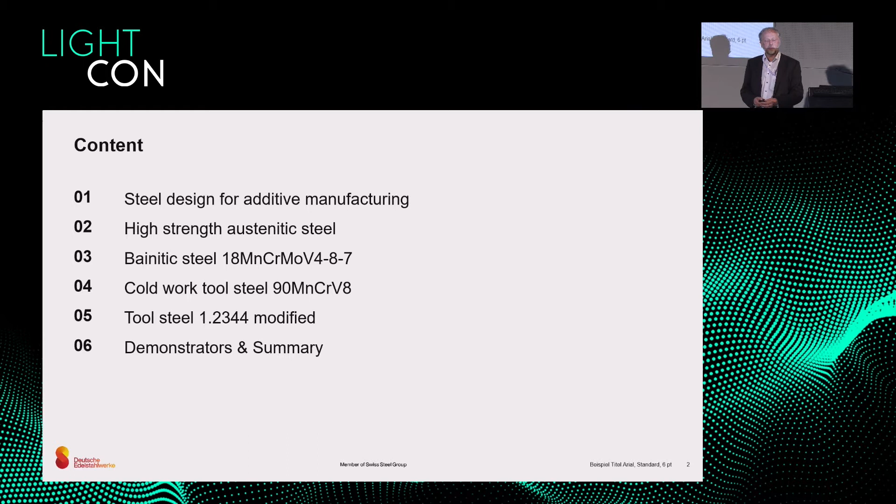I will shortly give an introduction about how we do steel design for additive manufacturing. Then I will present four new steels, and I will show you a few demonstrators and give you a short summary about the new steels.

How do we design new steels? We start with a wish list. We have a lot of engineers here, and I think most of them have had at least one semester of material science. One common steel is a quenched and tempered steel, 42CrMo4. Another one is also a quenched and tempered steel, a tool steel with AISI designation H13. The European designation is 2344.

Steel has some very interesting properties. It has a high temperature structure, a very dense structure, but soft. We call it austenite, a face-centered structure. It also has a low temperature structure. This heat treatment, the quench and tempering process, is a very nice property of steel, because you can adjust the mechanical properties by the heat treatment. You can adjust toughness, strength, and hardness to your needs. This is a very nice property, but it also causes some difficulties, as shown later.

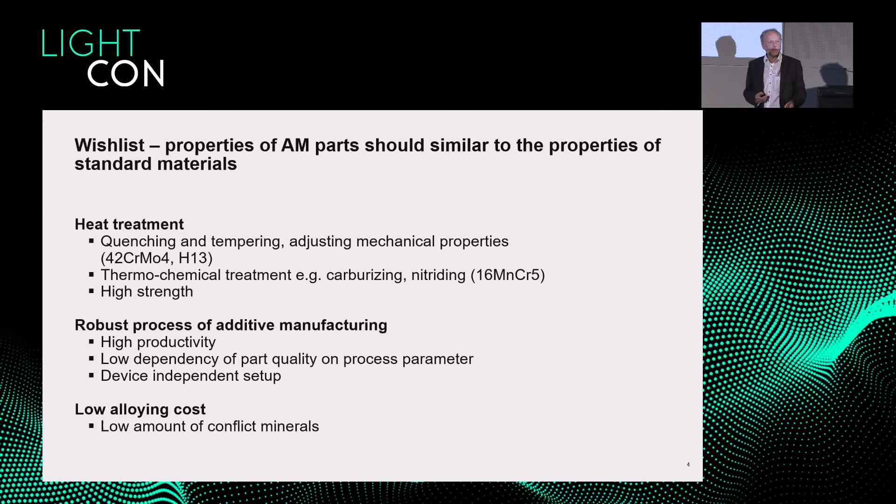So starting the design of new materials or new steels for additive manufacturing, we work with a very simple model. This is the measured elongation over temperature, valid for a process of rapid heating and rapid cooling, which is standard for additive manufacturing when you produce your part layer by layer. You start with high temperature because you heat a small spot, within a big amount of processed material. You cool very fast, and then you have a phase transition at low temperature.

Normally, this is a martensite. In this case, you have a slightly abnormal behavior of this material: you cool it down, and it increases in size. That's typical for steel, caused by this phase transition from the high temperature structure to the low temperature structure. This causes some internal stresses if we work with a model of two layers. The cold one is still martensite, and the upper layer is transforming from austenite to martensite. Martensite can be very hard, and this produces stresses in the lower layer.

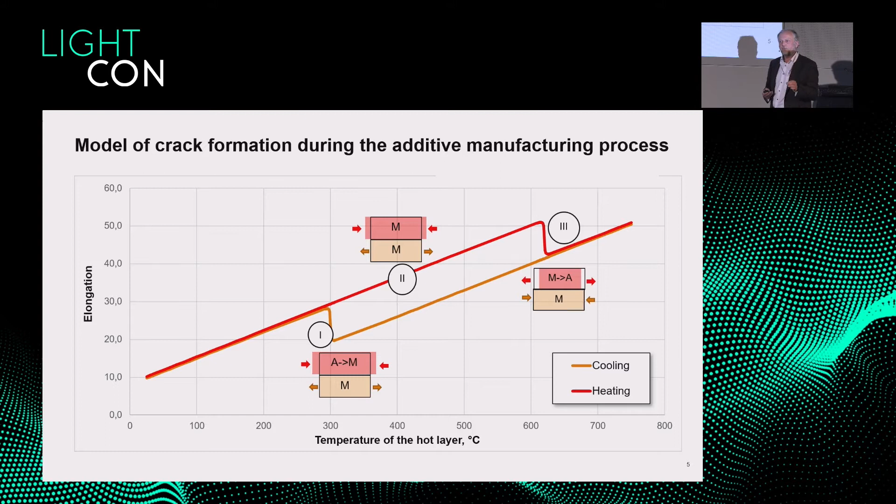So on this model, we are looking now for new grades which better fit the needs as mentioned before. And that's for later reading.

We start with high-strength austenitic steels. In this case, we have this 316L. Here's the analysis.

The austenite is stabilized by nickel. It has a high amount of nickel. How do we avoid nickel in this case? We move from nickel to manganese. It's also an austenite stabilizer. And we want to increase the strength, so we increased the amount of carbon and nitrogen.

Actually, the 316L has a low carbon and nitrogen content. And due to the structure of austenite, this causes it to be very soft. We call the 316L a steel without properties. It's even not corroding.

With this alloying with carbon and nitrogen, we avoid the formation of martensite. We have stabilized the austenite.

So in this model, we stick on the blue line for the complete building of the component.

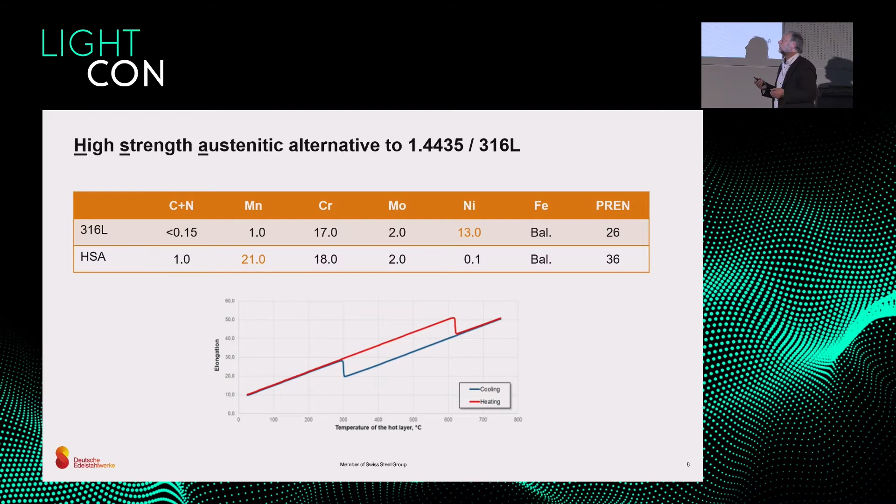Here are the mechanical properties. The red line is the new grade HSA. We increased the yield strength, which is important for construction, by nearly a factor of 2, and tensile strength the same. For the higher strength, you have to pay with less elongation or ductility, but the steel is still, due to the austenitic structure, very ductile, and you have a high toughness.

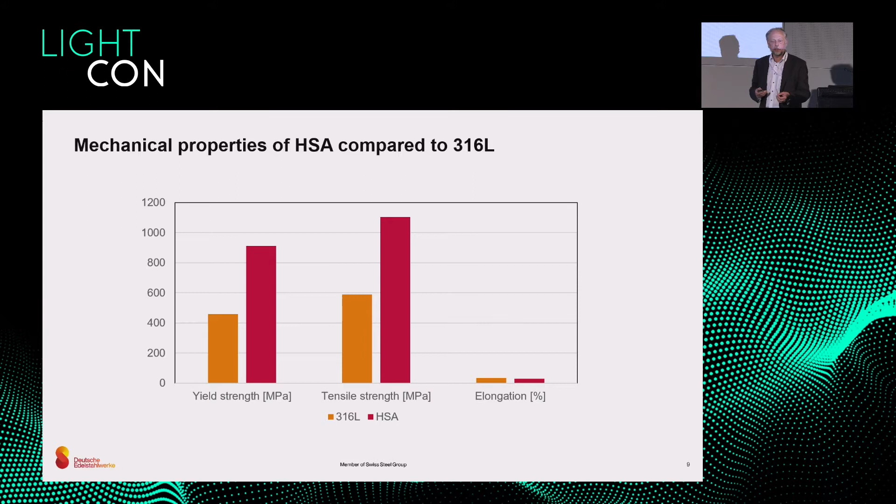If we compare the two grades, the HSA is nickel-free, without nickel. It has a higher strength. The PREN number is something like the corrosion resistance, a chromium equivalent. And the big advantage of the 316L is that everybody who delivers printers has process parameters for this grade.

And the HSA can be processed with the same process parameters as the 316L. You change nothing, you can print it with the same parameters, just change the powder.

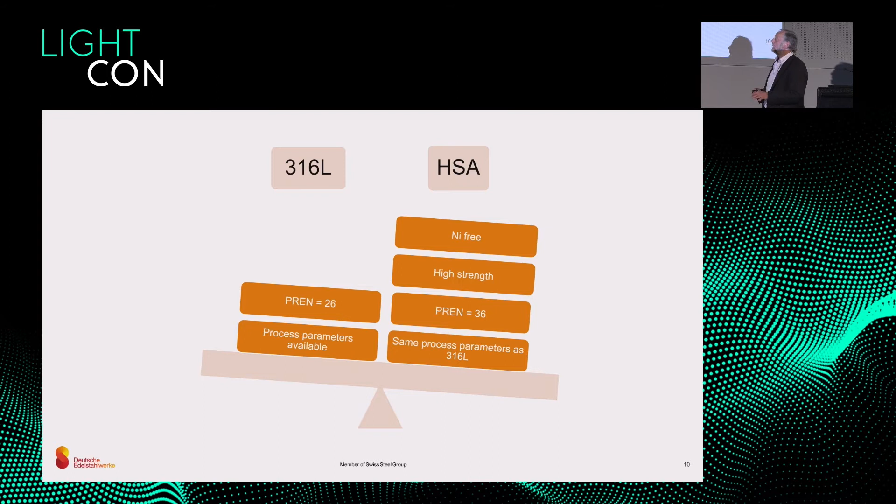That was the easy task. Now it becomes slightly more difficult. We use a bainitic grade. That's, I think for most of you, hopefully not heavy metal.

This is a CCT diagram. It's a continuous cooling diagram, as mentioned. We have a high temperature phase, we have a low temperature phase. And the low temperature phase properties depend on the cooling rate.

So if we cool very fast, we reach martensite. If we cool very slow, we achieve a structure of pearlite and ferrite, and we have a structure in between, that's the bainite. In the last decades, a lot of bainitic steels were developed, to try to save energy and CO2 by avoiding heat treatment.

So you quench, that's the first heat treatment, and then you have to temper, that's the second heat treatment. And the idea of the bainitic steels is: you have to heat up, deform, forge - you have to do it anyway - and then you cool down and do nothing, cooling with the right cooling rate, and you get a bainitic structure.

Bainite looks very similar to martensite and has nearly similar properties to a quenched and tempered martensite. Then you have to adjust - to increase the range for the bainite transformation, you have to play with the chemical analysis, and this is done in this case with carbon.

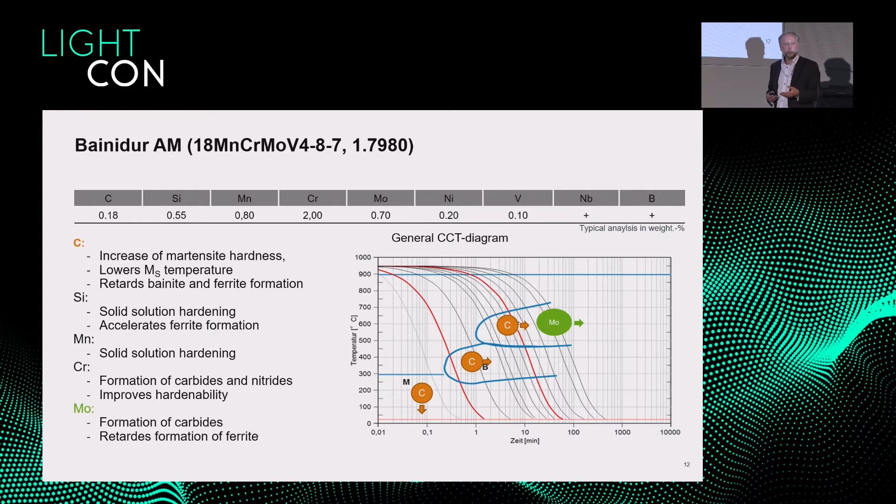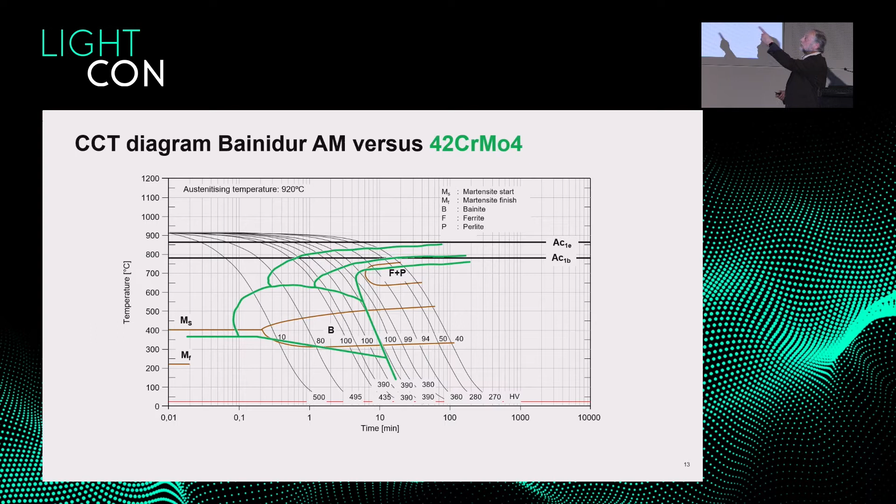Here's the comparison of this development. We have a very broad range of cooling rates to form complete bainite. The green lines show the same CCT diagram for 42CrMo4, and we claim we have the longest nose in the steel industry regarding the bainite transformation, because this looks like a nose.

At this point, the idea is to improve the additive manufacturing process with a steel that has an austenite-martensite or bainite transformation to achieve a lower hardness.

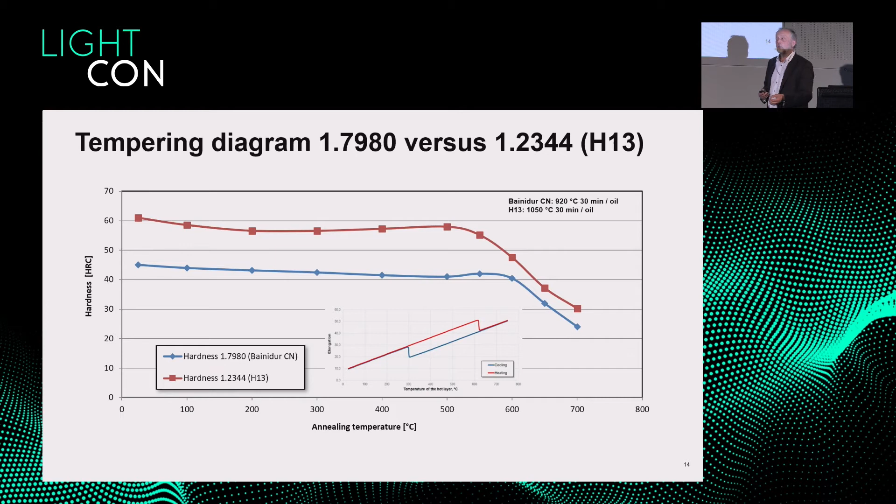Here are the mechanical properties of our grade. We call it now Bainidur AM, for additive manufacturing. There's a material number, and you get very good mechanical properties. You reach yield strengths above 1000 MPa, and if you look in your car, it's far above the steels you get today.

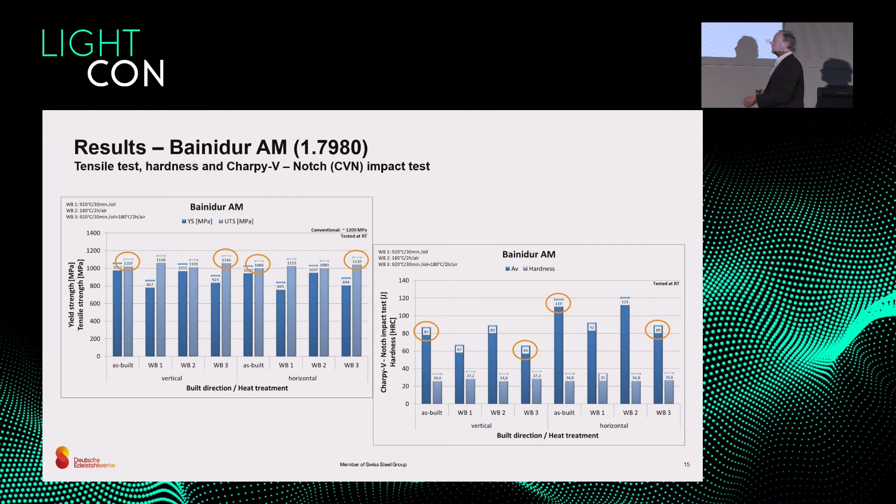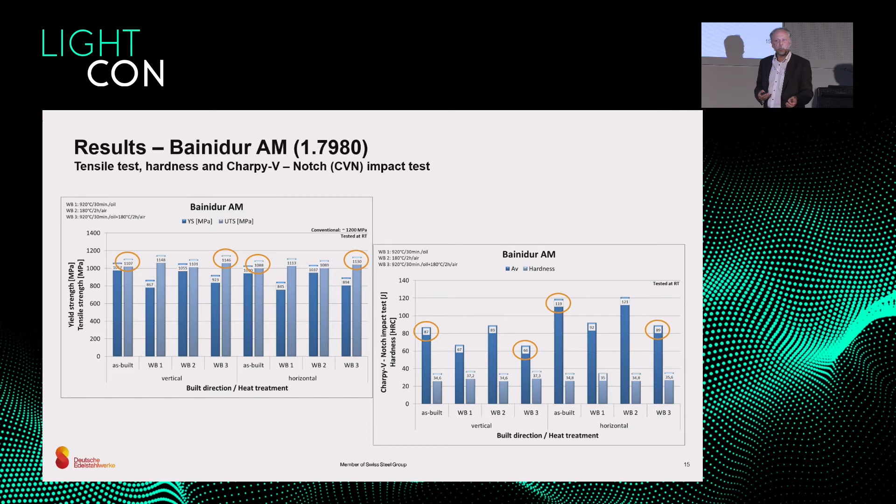In the as-built structure, you get a Charpy impact toughness above 80 joules, even more than you have in your cars. So you can use this material in the as-built condition, or you can do heat treatment. You can use this material also without any heat treatment, and with heat treatment you get nearly the same results as if you use bulk material. This leads me to the next picture.

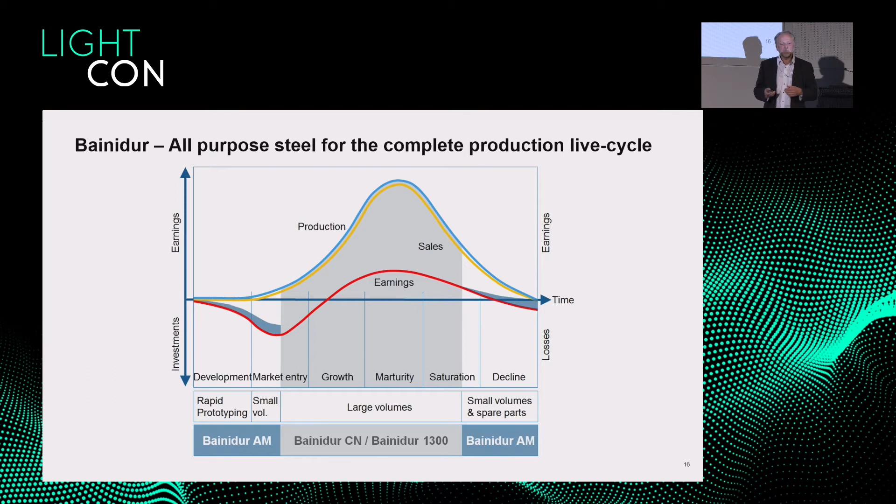What is the special use of this grade? If you start from a development phase, you have an engineering steel. You can do everything on testing, your chemical treatment, build your prototypes. If you start with mass production, you move from additive manufacturing to standard bars and forging, and have an efficient and cost-efficient process for large volumes. At the end of the lifetime, you can move back to replacement of spare parts without change of the drawing.

That's an obstacle for introducing this material in the automotive industry if you have to change the drawings. The next one is the tool steel, and the design is simply developed by looking in the brochures and looking for a martensite start temperature.

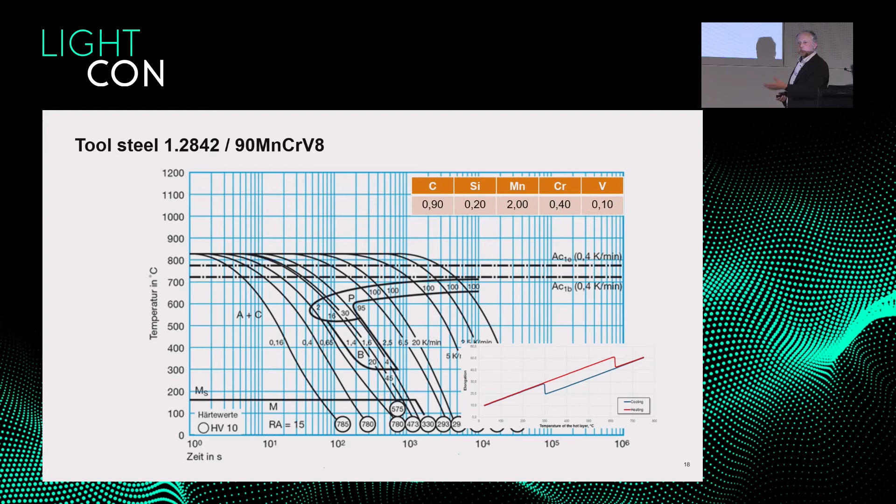A lot of available machines have a preheating temperature up to 200 degrees. So we are looking for martensitic material with a martensite start temperature below 200, and this is a cold work tool steel with a high amount of carbon. So you never reach the phase transition. You stick in the austenitic regime, and this is a very easy to print material.

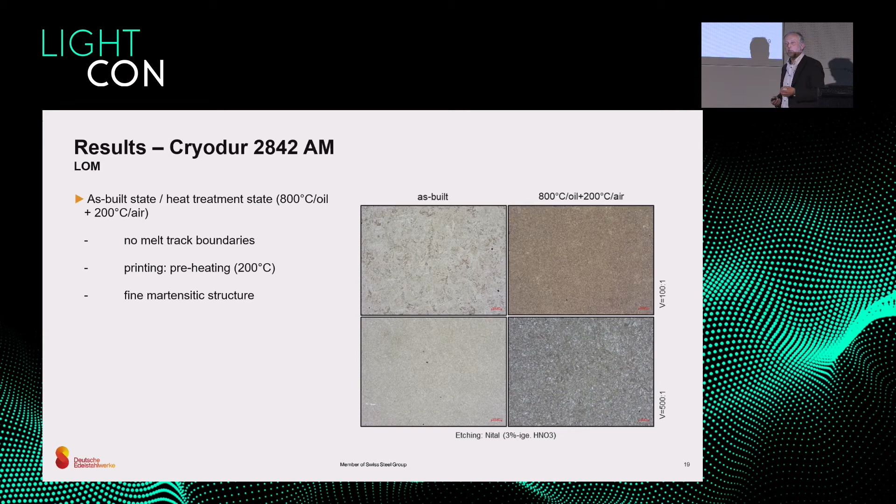You can use a preheating temperature of 200 degrees centigrade. In the as-built condition, you get a very fine structure, and you can use it as-built with a preheating of 200 degrees Celsius. You can use it even without preheating - it's possible, astonishing, but you get a rather ugly structure. It's a mixed structure of martensite and retained austenite, and then you have to do a heat treatment.

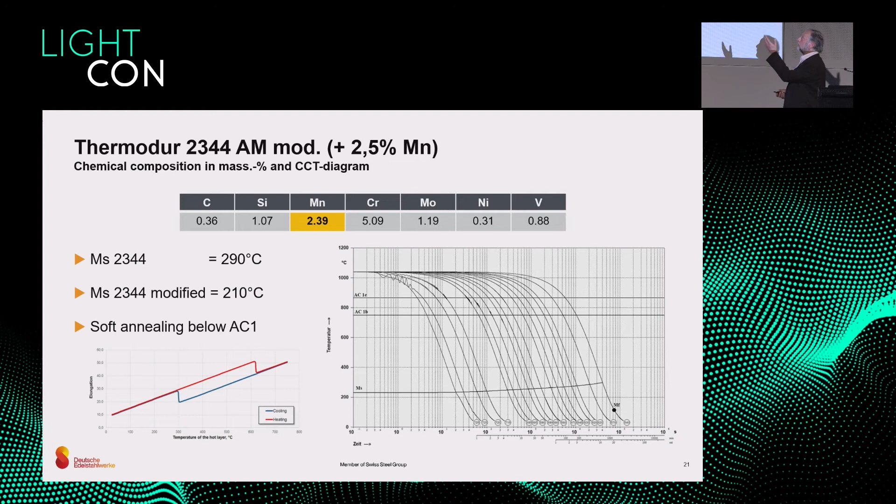It's a view in the future. We changed the standard grade 2344. It's not very easy to manufacture in additive manufacturing - you have to have very high preheating temperatures, and we try to decrease the martensite start temperature without losing the other properties the end user knows. Also in the CCT diagram, very simple: you just have an austenite regime and only martensite, so you have to adapt the heat treatment. Very similar properties - it is processable at a temperature around less than 300 degrees.

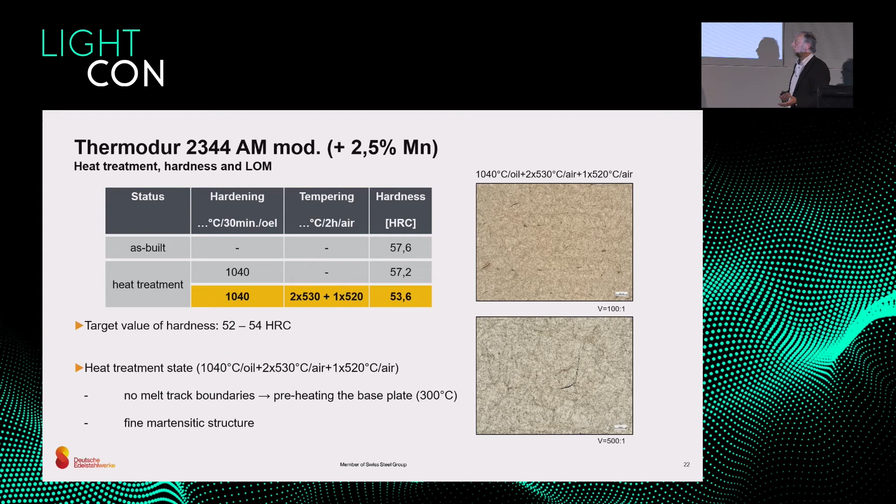But we did not reach our aim of less than 200, so we still have to work on this grade - it's not finished. So we'll show a few parts.

The first one is a part of a hydraulic block, done with a layer size of 120 microns. Normally they use 30 to 40. It's very efficient, and you can do some kind of high-speed printing with this grade. That's a cutting plate from this Cryodur grade, and we are just testing in the field a mold for plastic application.

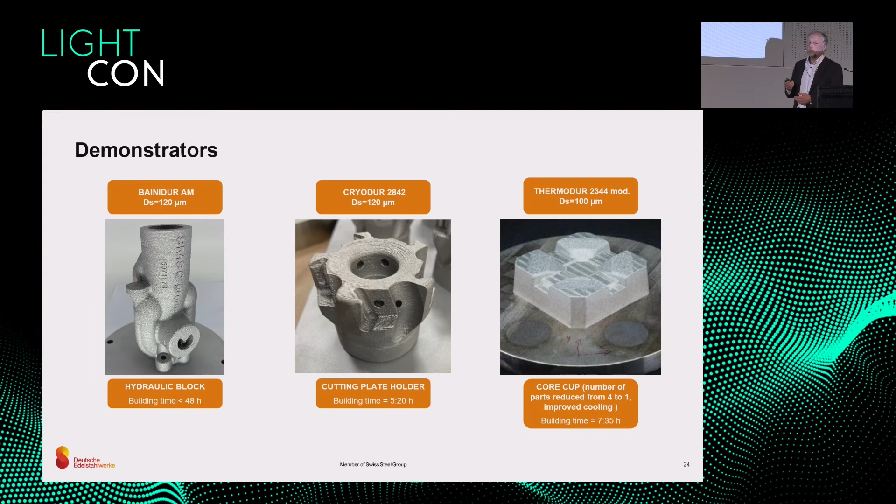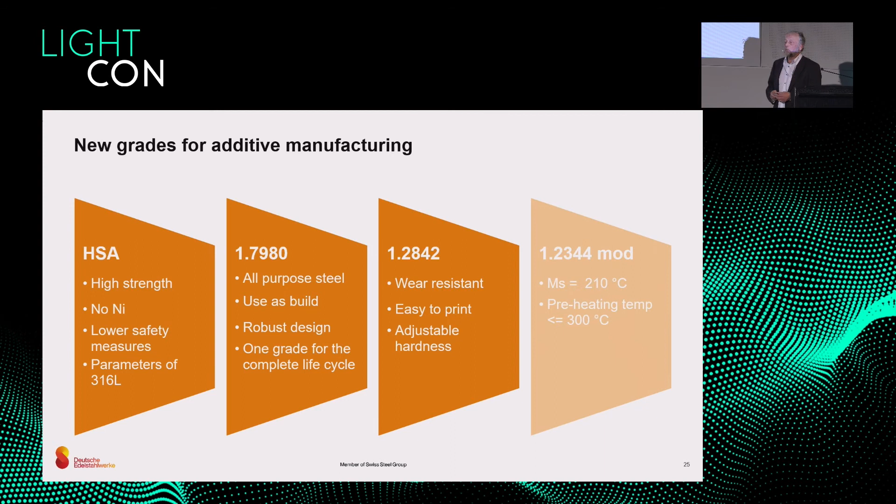So if I summarize this, we have 3 steels: at least a high strength austenite with no nickel, an all-purpose steel 7980, one grade for the complete life cycle. 2842, you can use it for wear resistance and for bearings, and in development we are on a good way. A tool steel with a preheating temperature less than 300 but above 200 degrees Celsius.